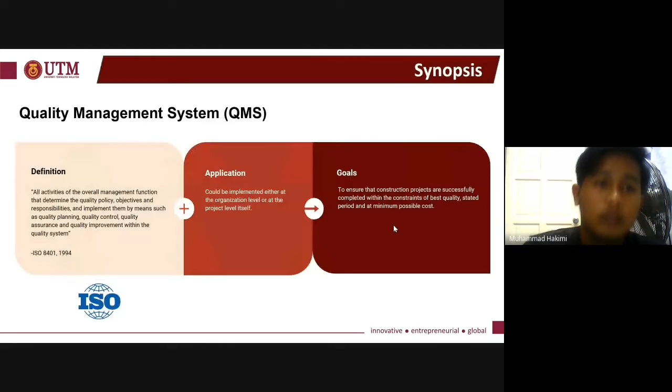Next, we would like to share about the case study synopsis. What is Quality Management System, QMS? The definition is all activities of the overall management function that determine the quality policy, objective, and responsibilities, and implement them by means such as quality planning, quality control, quality assurance, and quality improvement within the quality system. It could be implemented either at the organization level or at the project level itself. Its goals are to ensure that construction projects are successfully completed within the constraint of best quality, stated period, and at minimum possible cost.

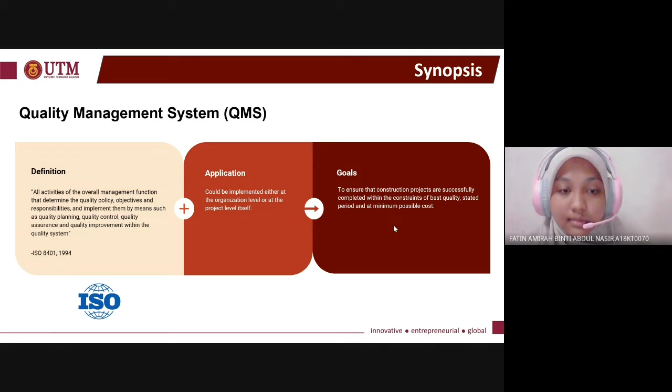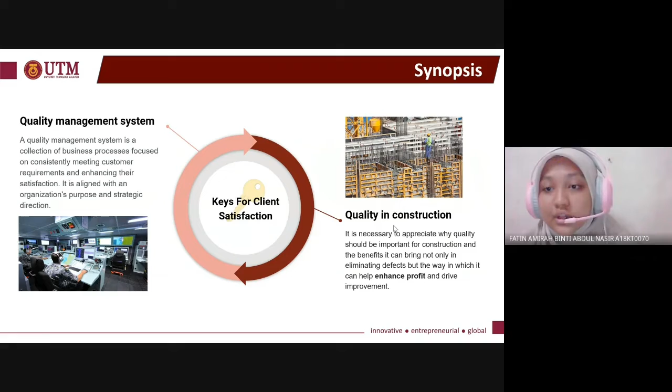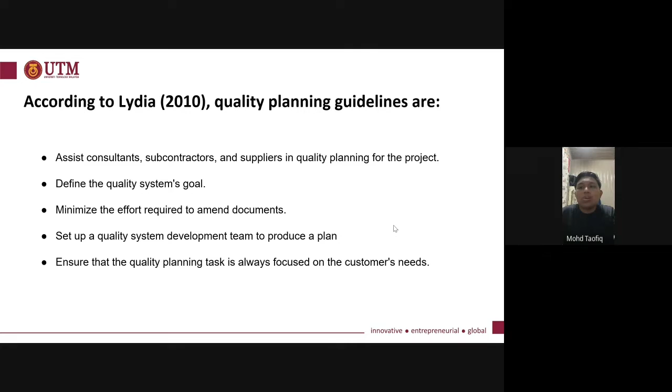According to Lydia 2010, quality planning guidelines assist consultant, subcontractor and supplier in quality planning for the project. Second, define the quality system goal, minimize the effort required to amend document, set up quality system development team to produce a plan, and last, ensure that the quality planning task is always focused on the customer need.

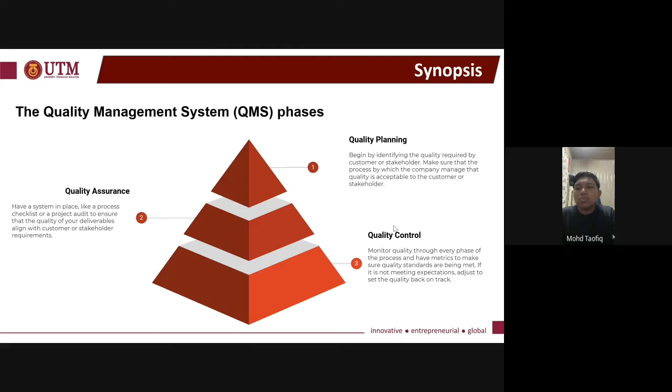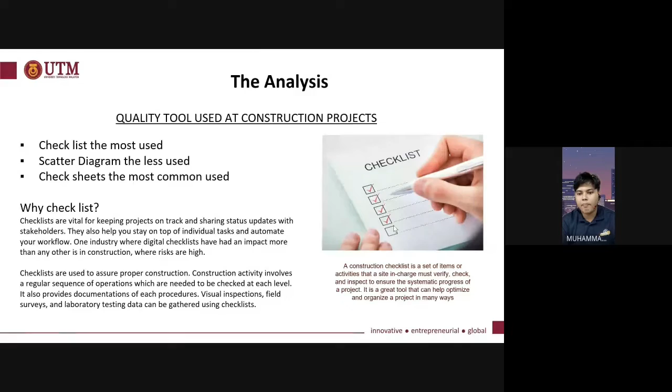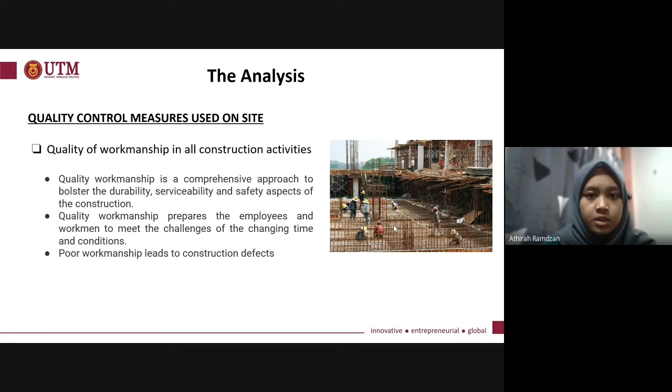Quality workmanship prepares the employees and workmen to meet the challenges of the changing time and conditions in the construction site. Poor workmanship will lead to construction defects. So if the building itself already has a defect, it could harm the occupants as there is no safety characteristic.

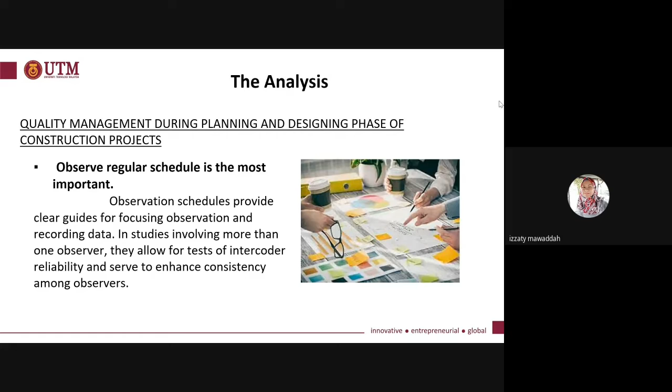Customer focus means putting your customer's needs first. When a business has customer focus, they dedicate to enhancing customer satisfaction and building a strong customer relationship. So by completing work from a client-focused standpoint, we make sure we're representing our company, which often leads to additional work from the same client. It also leads to earning work with other companies who are involved in the project.

So how do we want to make the project with customer focus? We need to keep the dialogue open, meaning constant communication between the client and the contractor. The contractor can share updates and issue insights about the project, while the client can give recommendations or opinions. This way, we make the approval process much smoother and faster. So next, I pass to another member.

In addition, we also analyze the importance of the quality management system at construction projects. The most important is customer satisfaction. Customer satisfaction is an important factor in the development of the construction process and customer relationship. As construction companies face increasing competition, greater attention continues to be placed on customer relationships and satisfied customers. Customer satisfaction enables construction companies to differentiate themselves from their competitors and create sustainable advantage.

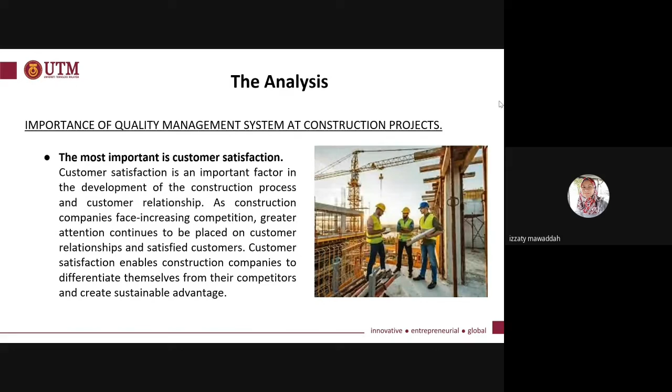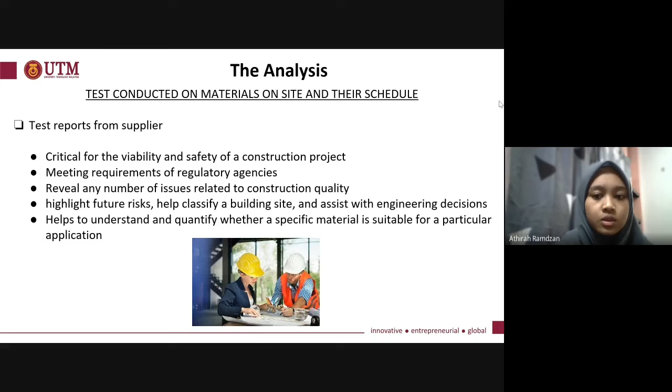Next, the last one is the test conducted on materials on site and their schedule. The respondent chose the test report from supplier as the most important, because it is critical for the viability and safety of a construction project in meeting requirements of regulatory agencies. The test report reveals any number of issues related to construction quality, highlights future risks, helps classify a building site, and assists with engineering decisions. It also helps to understand and quantify whether a specific material is suitable for a particular application.

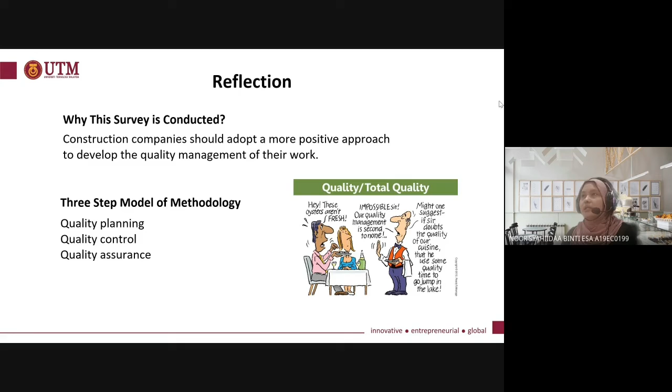Next, I'm going to talk about the reflection - why this survey was conducted. Construction companies should adopt a more positive approach to develop the quality management of their work. The three-step model methodology used in conducting the survey includes quality planning, quality control, and quality assurance.

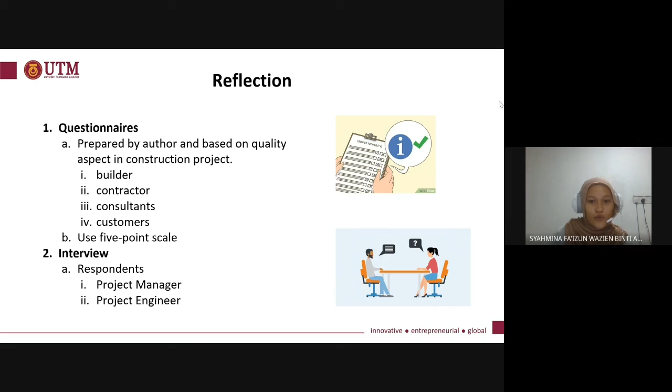In this case study, a number of questions were asked, and various optional points for some questions are provided. The respondents had to rate these points on a 5-point rating scale: 5 for very strong, 4 for strong, 3 for moderate, 2 for less, and 1 for very less. The respondents are project managers and project engineers at construction projects with experience not less than 15 years.

What did we learn? First, satisfaction of all stakeholders in the industry, better understanding of quality control procedure, and satisfaction of client. A suitable quality control method for the project, development of the quality of strength in construction, and total quality management at construction projects.

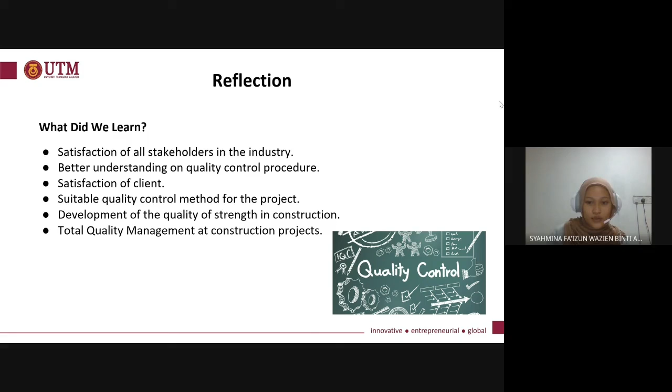We can conclude that this case study is important because we can see how to handle the quality management system at construction projects. That's all from us. Thank you.